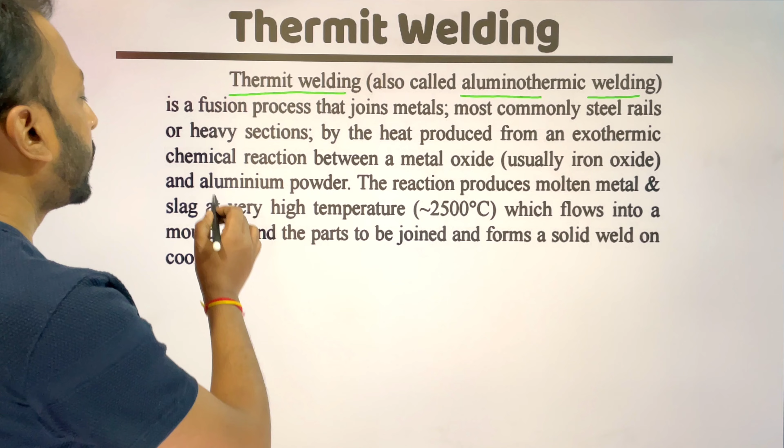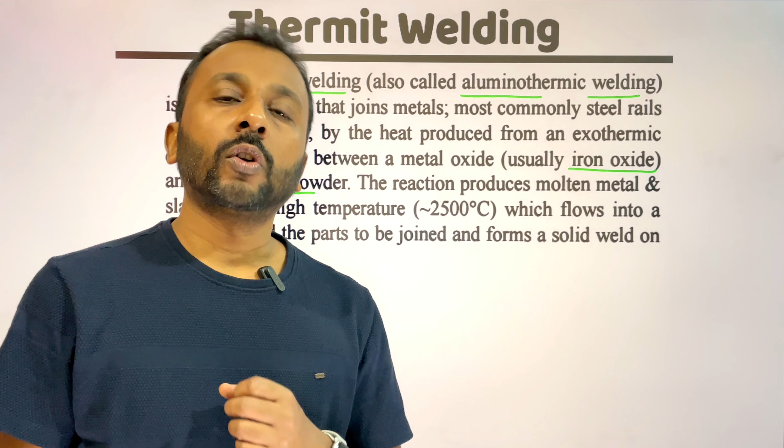Thermit welding process is a fusion welding process. We heat the elements, and after fusion and solidification we get the weldment. The heat is applied externally, so thermit welding is also called aluminothermic welding. We use aluminium powder and iron oxide, and by the chemical reaction of these two elements we get melted iron, which creates heat near about 2500 degrees Celsius. It is a fusion welding process that joins metal, applied where electricity is not available and arc or gas welding is not accurate for that process.

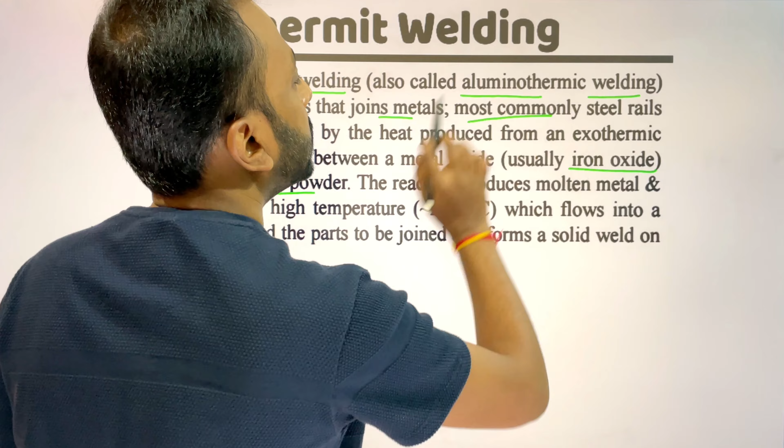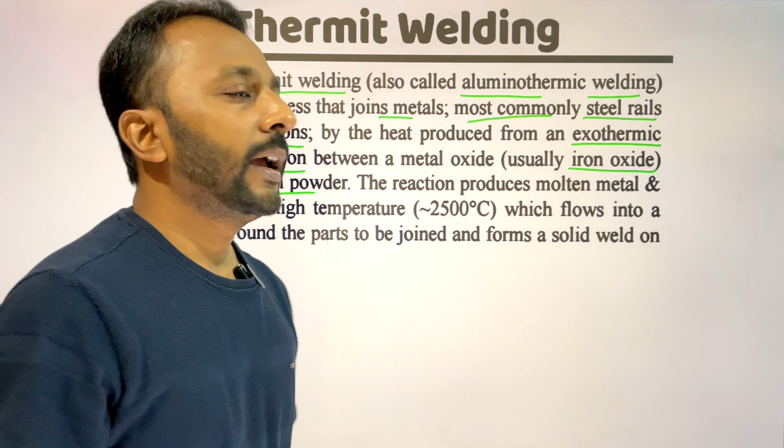We weld large sections of metals where gas welding can't be applied, commonly joining steel rails or heavy sections. The heat is produced from an exothermic chemical reaction between a metal oxide, usually iron oxide, and aluminium powder. When we ignite these two elements, the chemical reaction occurs and a very high temperature, near about 2500 degrees Celsius, melts the joint, and after solidification we get the thermit welding joint.

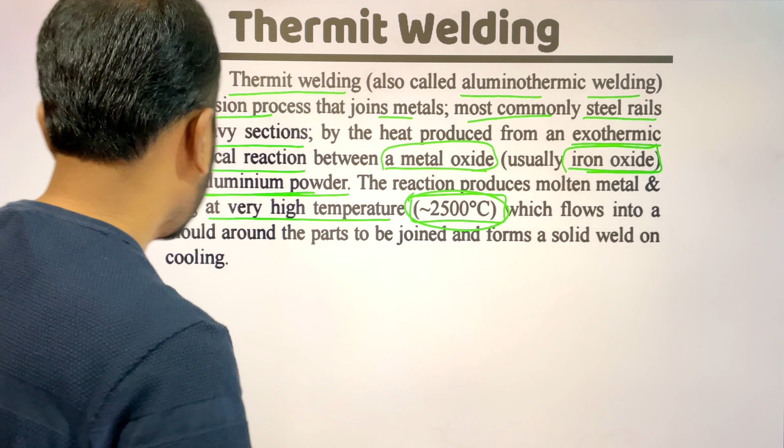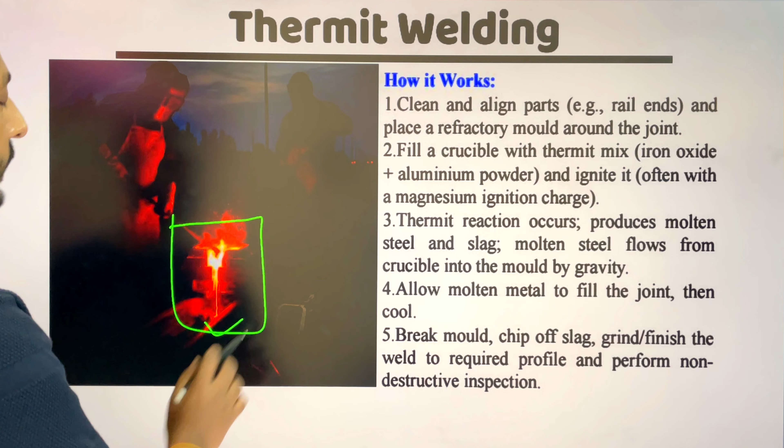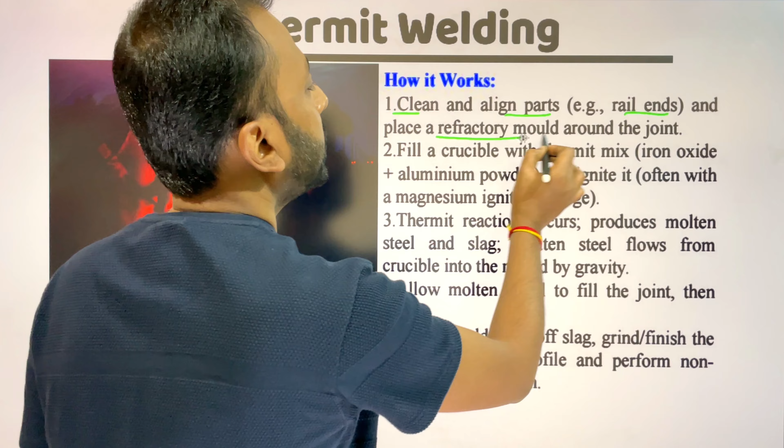So how does it work? Here we can see the process. Two men are working and the welding is done at this point. We have to clean and align parts like rail ends and create a refractory mold around the joint. When the refractory mold is created, a crucible with thermit mix is used. The thermit mix contains iron oxide and aluminium powder. We ignite it, and after ignition the thermit reaction occurs and produces molten steel.

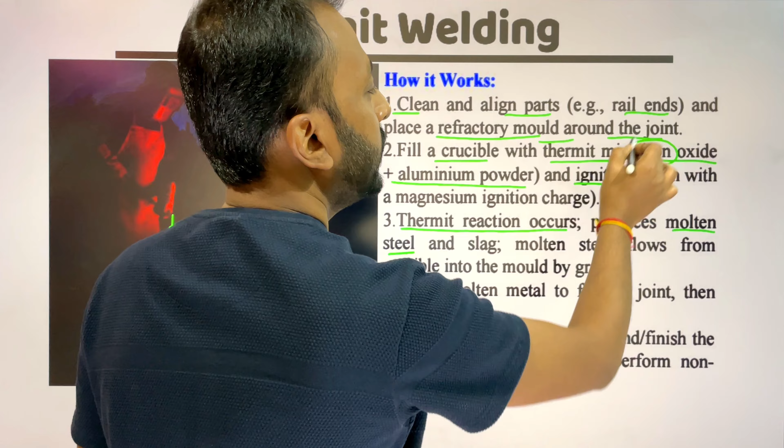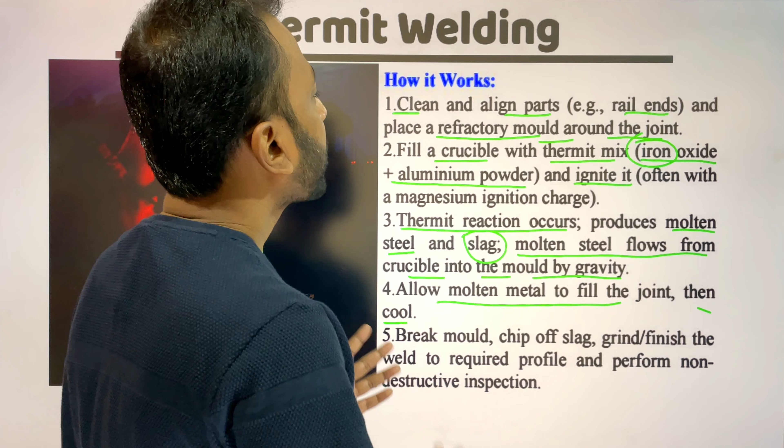Molten steel comes from this iron oxide. The iron becomes molten and the extra chemical reacts as slag. The molten steel flows from the crucible into the mold by gravity. When the molten metal fills the joint, it cools, and after breaking the refractory mold we get the weldment or welding joint by the thermite welding process.

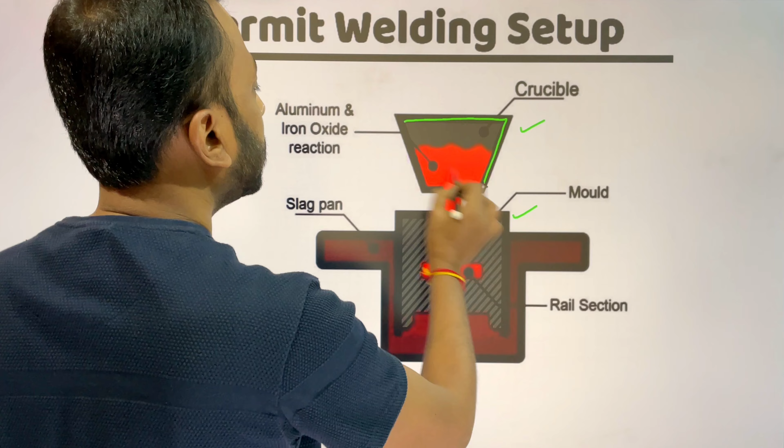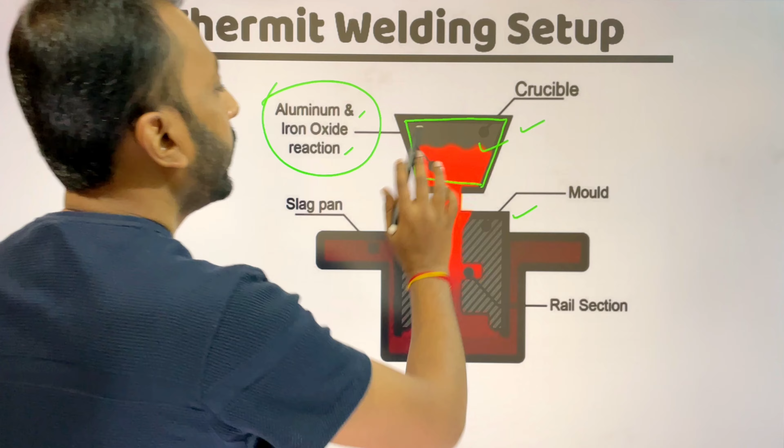In this figure we can see the thermite welding process clearly. This is the crucible and this is the mold, where we put the composition of aluminium and iron oxide. When aluminium and iron oxide are ignited, here we can see the ignition process. Heat is generated, and this iron melts and fills the section. After it is fully filled, we get the welding joint.

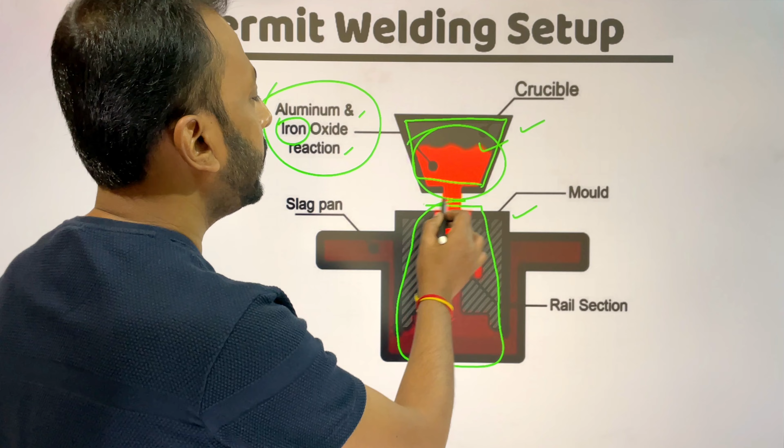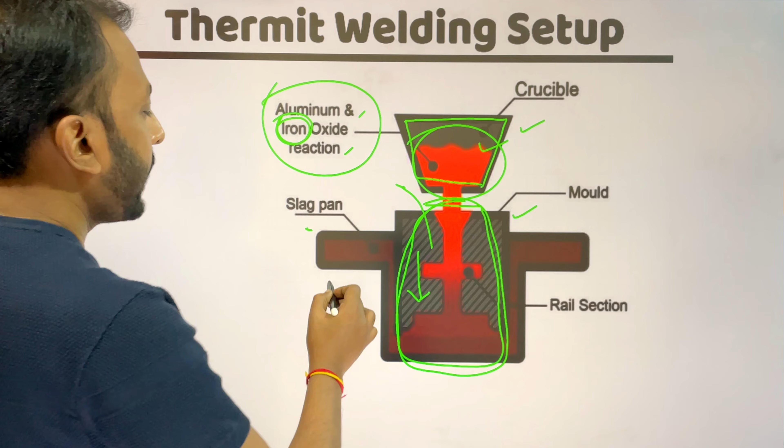The molten iron flows through this section with the help of gravity, and these are the slag pans, this one and this one. The slag comes over through this. When the chemical reaction is done and this portion is fully filled, the slag overflows from this and fills these pans. This is the rail section.

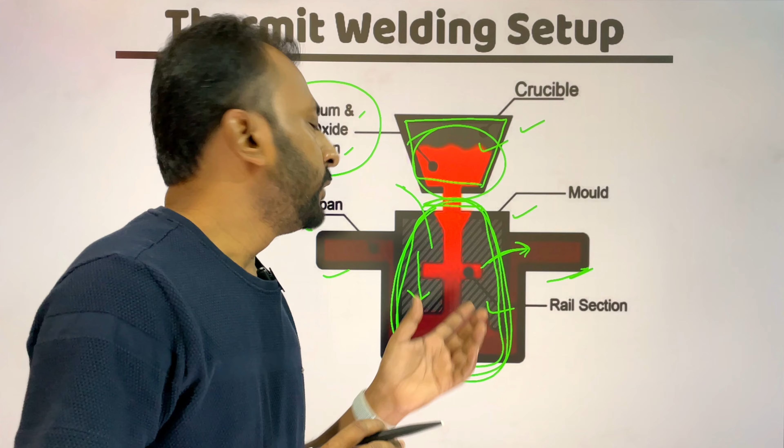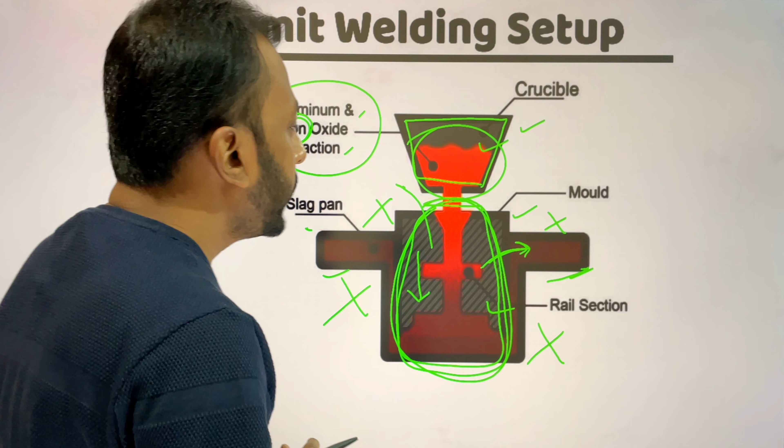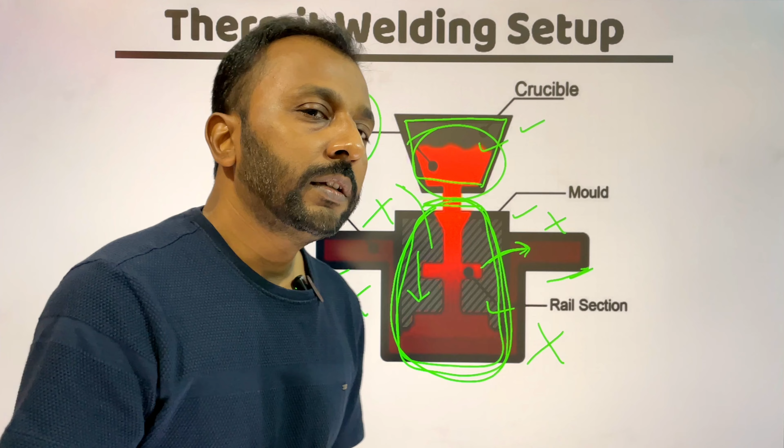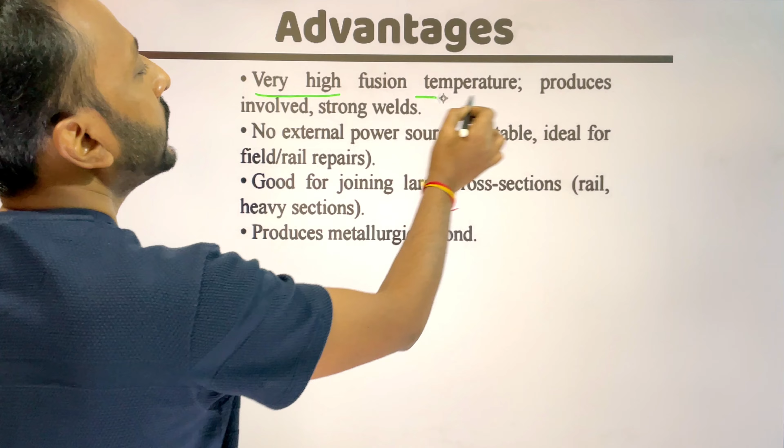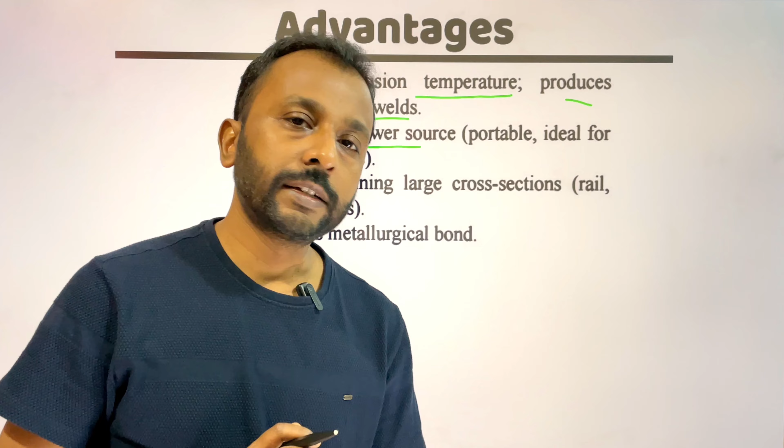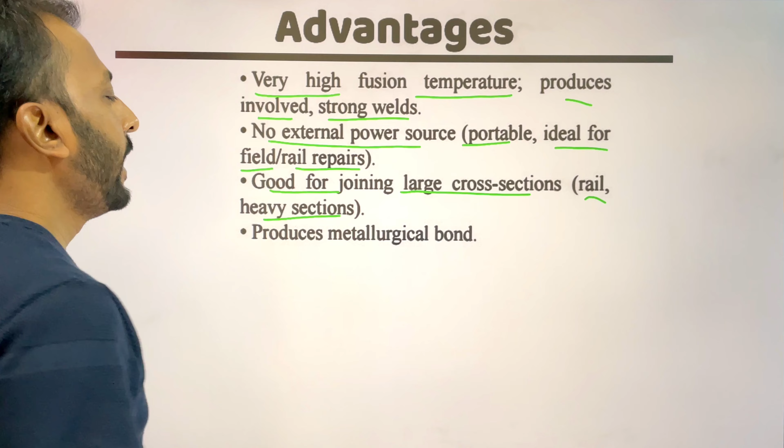What are the advantages of the thermite welding process? It has a very high fusion temperature and produces strong welds. No external power source is required—we are not using any gas or electric power source—and it is very portable and ideal for field or rail repairs. It is good for joining large cross sections like rail sections or heavy sections, and produces a metallurgical bond. These are the advantages.

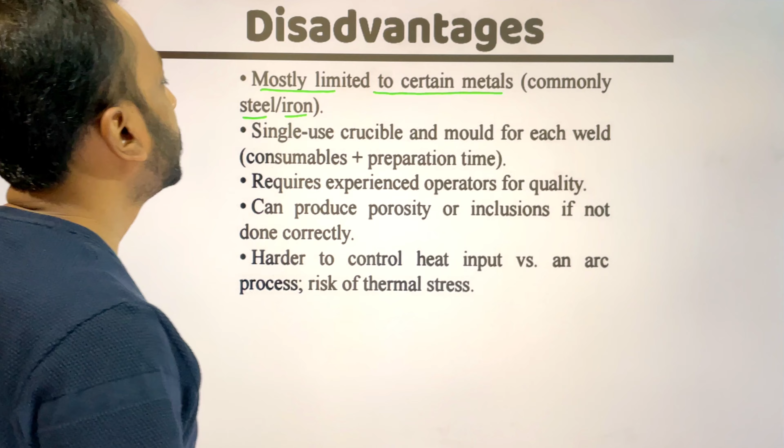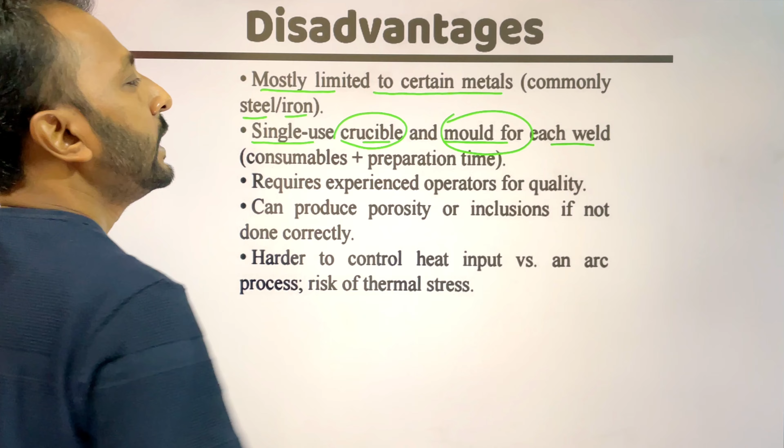It also has some limitations or disadvantages: it is mostly limited to certain metals, commonly steel or iron—other metals cannot be welded using this method. It requires a single use crucible and mold for each weld, so we have to create the crucible and mold every time we want to join, which is very time consuming to prepare, as every time is like the first time for this process.

It requires experienced operators for quality. If the welder is not experienced, the welding quality will be very poor and can produce porosity or inclusions if not done correctly. The operator must be very skilled, and it is harder to control heat input. We are able to control heat in the arc welding process, but in this process heat control is very difficult.

In this video I have discussed the applications, disadvantages, advantages, the working setup, the working principle, and the definition of the thermite welding process.